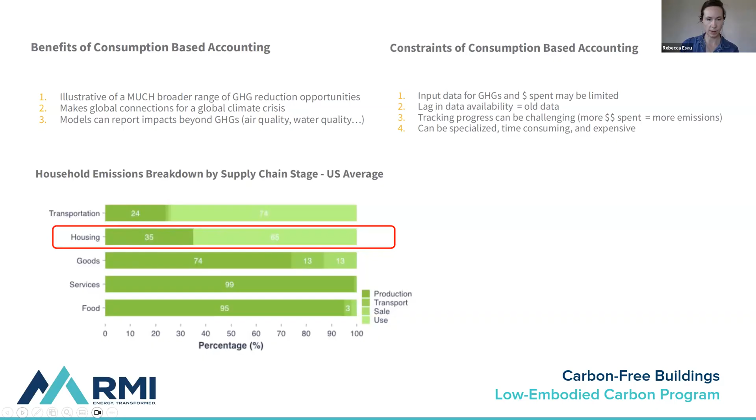So you can go back and look at his slide deck. It's pretty dense. And we also have the recording.

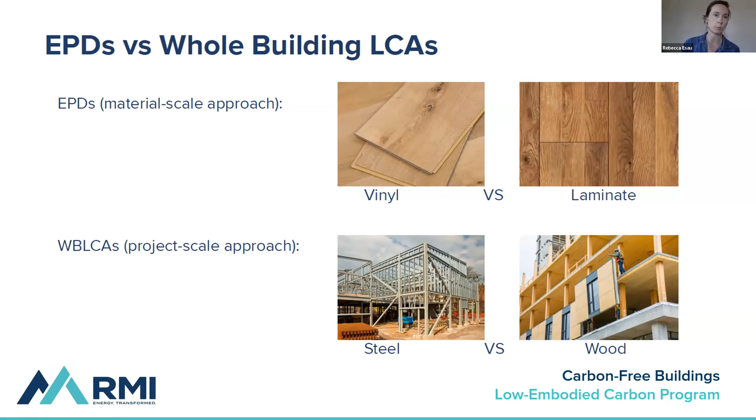Then we also talked about more specifically how to measure embodied carbon at both the project level and the product level. We talked about EPDs, how those are really great documents you can use to compare between 2 different products that have the same function in a building. And then we looked at whole building LCAs, how you could do a calculation that would tell you the embodied carbon per square foot of a building. So we talked about the pros and cons of both of those measurement methods.

And then we had Beverly Craig from Mass CEC come online, and she told us about a few really interesting Massachusetts state programs that she's launched in the recent months.

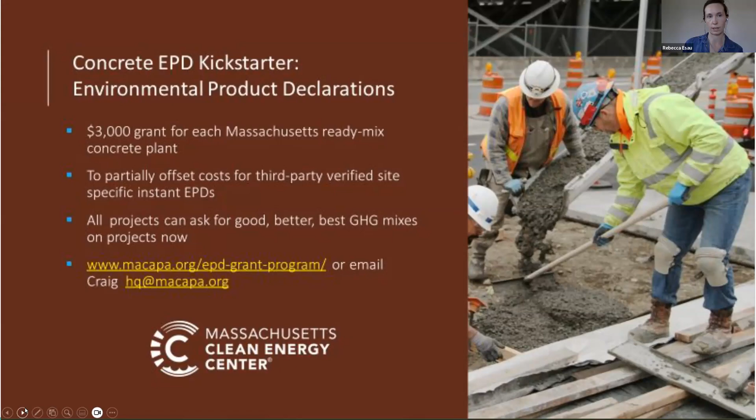The first is an EPD Kickstarter program. This is a grant program specifically for ready-mix concrete suppliers to get their EPDs. There's money of up to $3,000 for each ready-mix concrete plant to do an EPD that's then available to the consumer. There's also an embodied carbon reduction challenge, which looks at the whole building.

So project teams can submit their building projects into this competition. The entries are due March 31st of next year, and there are a few different prizes to be had for this.

And then lastly, this was not part of our presentation last time, but we've had a lot of discussion about concrete as a material we use in construction all the time. It has a really big opportunity to reduce embodied carbon. Many of you in smaller municipalities may not be building large buildings, but you may be replacing a sidewalk every once in a while or repaving a road. I recently attended this webinar and wanted to share this link with you. It's an excellent overview of low carbon concrete, what it looks like, how you can apply it, and an overview of policies that exist that help either through procurement policies or pilots.

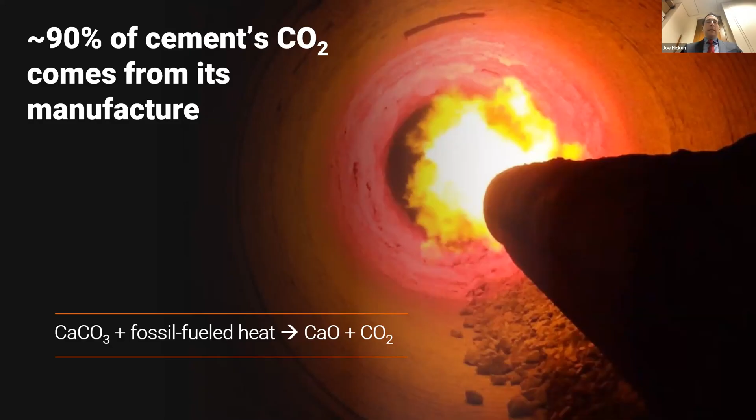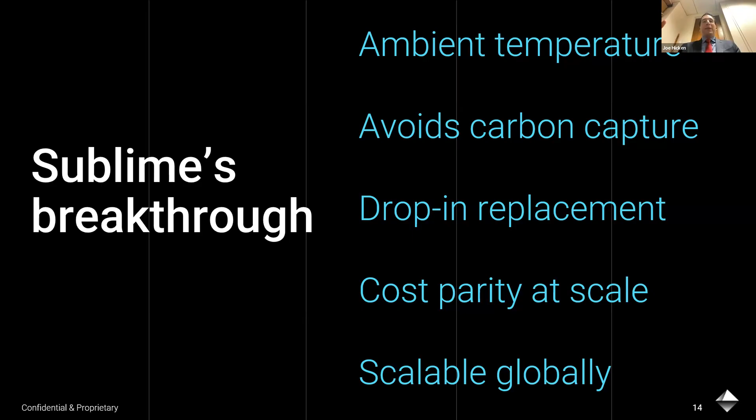Next slide, please. So Sublime Systems' contribution in this space is from my boss, Dr. Leah Ellis, and Professor Yet-Ming Chiang. You might have come across them in the climate technology space before as it relates to energy storage and transmission. They've invented a novel process, an ambient temperature process which avoids carbon capture. It produces the same drop-in material - designed to be the same functional material, both in the way it's transported, the way it feels when wet, and the way it hardens into that final product we're all familiar with in our sidewalks, roads, and buildings. We can scale this to cost parity, and the feedstocks are scalable globally, more abundant on planet Earth than today's limestone.

Next slide, please. So this is our product - concrete made with Sublime cement. Our process is unique in that it's a true zero manufacturing process. We're not emitting CO2 and accounting for it through some sort of net calculation. It's truly a carbon avoidance technology, which is really important when we think about what levers are available to us to mitigate these emissions.

Second, the company was founded on the idea that we can't bring a material that doesn't meet existing building standards. There's a lot of solutions trying to get at this carbon challenge, but they've got a harder road in terms of adoption because they don't meet an existing standard that the construction industry is familiar with. Ours meets ASTM C1157, the performance standard for hydraulic cements.

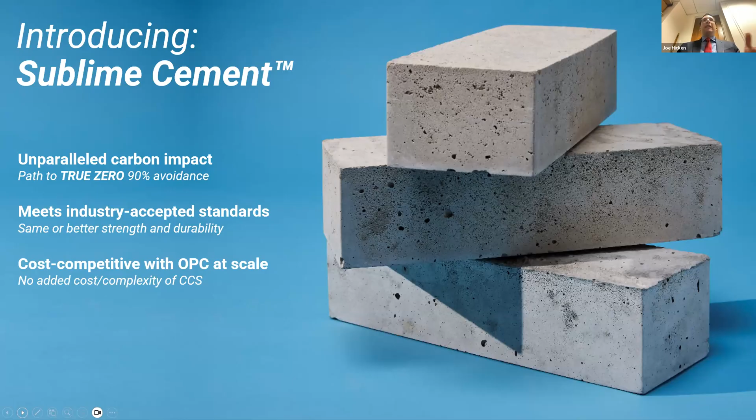The company's concept is that at scale, we can produce this material at cost parity without a price of carbon, without any additional financial considerations. We're trying to bring something that's truly just a cleaner version of the same material we use in all of our infrastructure.

So in context, how do we do what we do? I've got just a few more minutes, so I'll whip through these quickly. In today's manufacturing process, about half the emissions come from the fossil fuel itself, and half come from the raw materials.

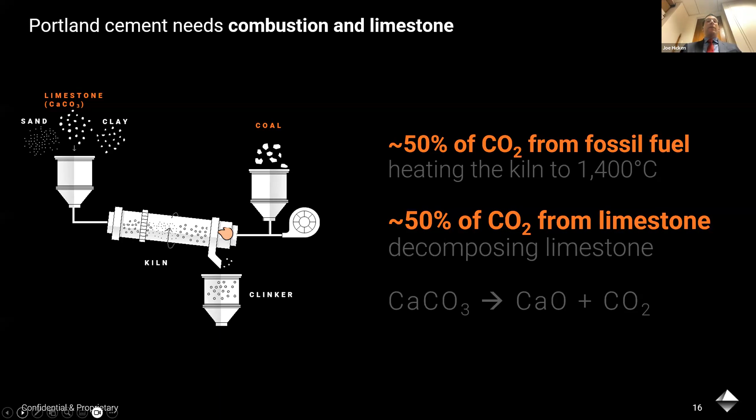As much as it hurts my heart to say this, no one really cares about cement—people care about concrete. Cement is manufactured, milled, stored in silos, transported through freight and water transportation, then procured by ready-mix concrete producers with rocks, stones, aggregate, admixtures and other chemicals. It's brought to the job site and poured, where it hardens into calcium silicate hydrate—the hardened phase we all know and love as concrete.

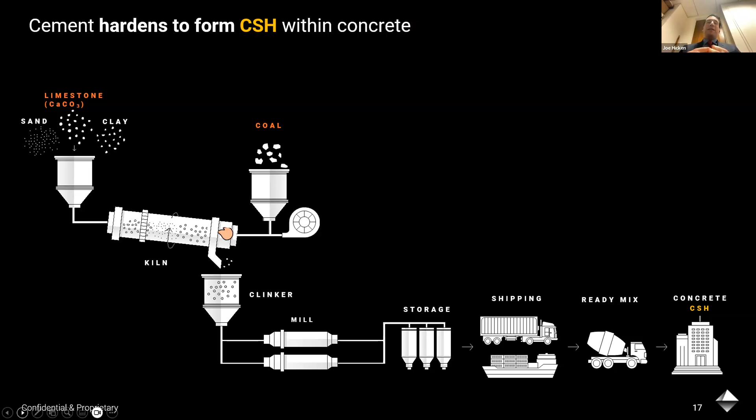At Sublime Systems, we're not interested in touching any of that downstream complexity. There's a huge, robust, and competent construction industry that does this all very well. So it was really important for us to only touch the very upstream part of this process.

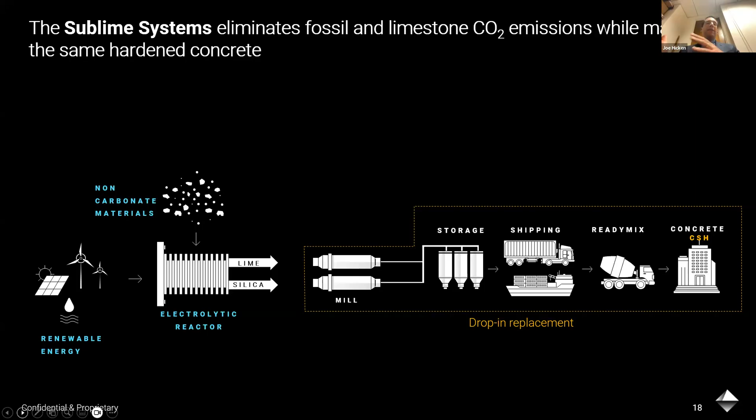Ours is an all-electric process powered by renewable electricity, using non-carbonate feedstock—we're not using limestone in the manufacture of our lime and silicates. We're producing a hydraulic cement, a calcium silicate hydraulic cement, that results in the same calcium silicate hydrate at the end of the equation.

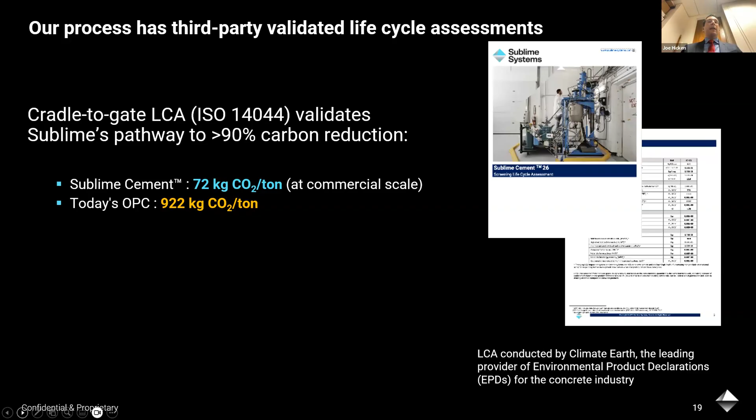Don't take our word for it. I like to tell people I work with a bunch of Boy Scouts and Girl Scouts in terms of the carbon avoidance of our process and the lack of other externalities—that's another question I often get. If you have a third-party EPD or LCA—you can't get an EPD until you've had a commercial facility operating for over a year—but we have a preliminary LCA that validates our process can avoid over 90% of the emissions in the manufacture of cement.

In terms of Sublime Systems and how we're scaling, and how we might be relevant to municipalities in the Commonwealth, we're rapidly scaling this—we have a TRL6 factory in Greentown Labs. We've basically de-risked the product from the performance standards and third-party validation and EPDs, and validated that this process can be autonomous and run at commercially relevant scale.

We've got the site selected and we're in the final stages of diligence on the parcel in Western Massachusetts, where we'll build out this next facility manufacturing 30,000 tons of cement per year. We'd love to engage with you all if you're thinking about infrastructure—municipalities have a critical role in climate action as it relates to mobility, but also the embodied carbon in infrastructure being deployed.

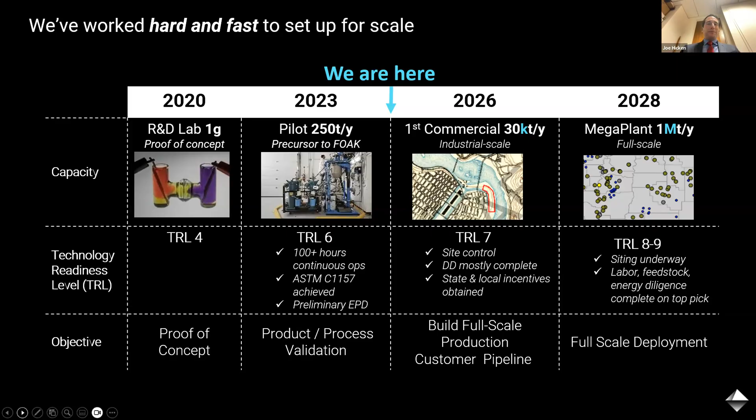I'll conclude on this last slide—this is a really interesting part for us in terms of scaling this technology: how do you all account for carbon in your operations? How are you thinking about future infrastructure, embodied carbon versus operational carbon? How might you make the case internally for investments in Scope 3 emissions reductions that Sublime Systems can help with, and understanding how we fit into your larger sustainability objectives would be a really important part of the conversation we'd love to continue having with you all.

So I'll wrap there, and unfortunately I'm going to have to miss the breakout sessions. I'm actually in Senator Markey's storage closet, a quiet place for me to chat with you all. But I hope to have an opportunity to chat more with you in depth if you're thinking about embodied carbon in construction of future infrastructure. Rebecca, Miranda, really appreciate the opportunity to address you all with this.

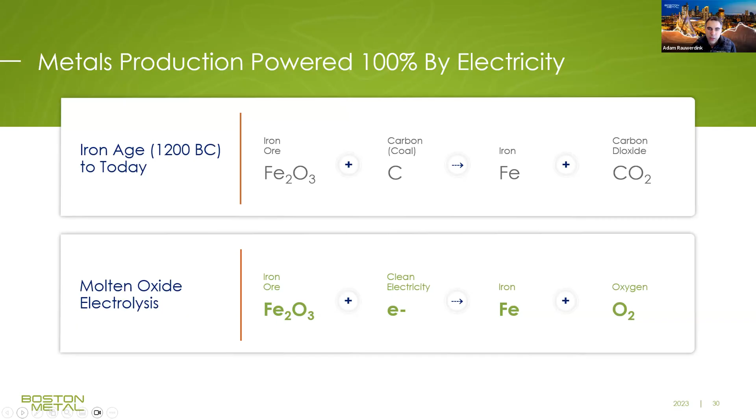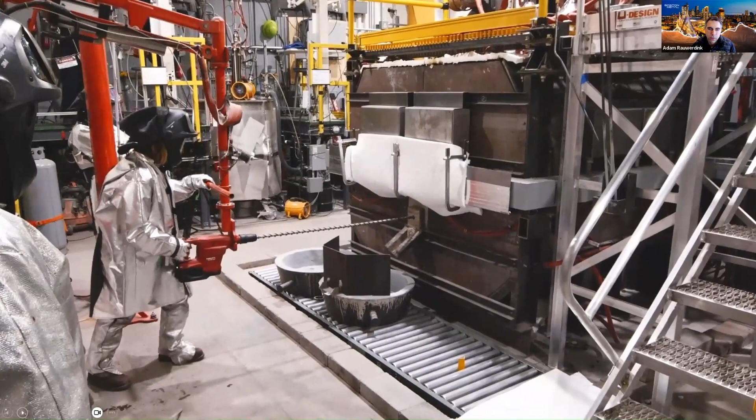So that's pouring molten steel. It's about 1600 degrees Celsius, close to 3000 degrees Fahrenheit. And again, that's the molten product produced without emissions.

From there, you can alloy that, cast it, roll it, heat treat it—whatever you need to do—using all the downstream processes to get the grades of steel you'd use today in bridges, in buildings, in power tools, in appliances, in automotives. But we've eliminated the first step in the process, which is where the emissions are today.

Go to the next slide. This is the future of what steel looks like today. 70% of steel is produced using carbon—that's where you think of the blast furnace. There's certainly been efficiency improvements, but they've never been able to separate steel production from carbon.

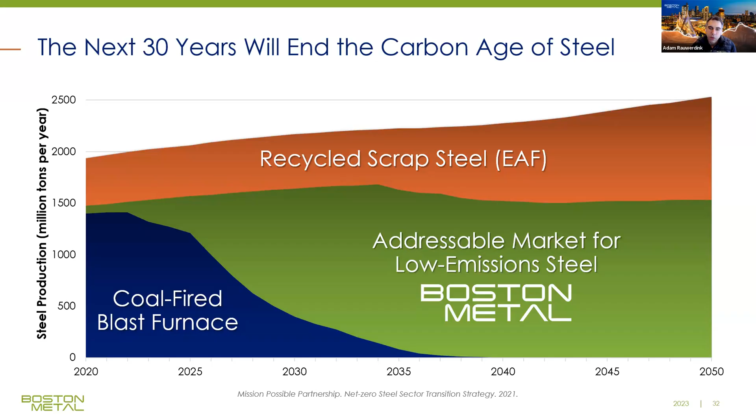Steel is great in that it can be recycled almost indefinitely, and about 30% of the global market is from recycling. That will grow over the decades ahead. But the big challenge is you've got 1.5 billion tons of steel being produced today using carbon. If you're going to achieve net zero in the next few decades, that process needs to change. And that's the technology and the scale of technology that we're developing at Boston Metal.

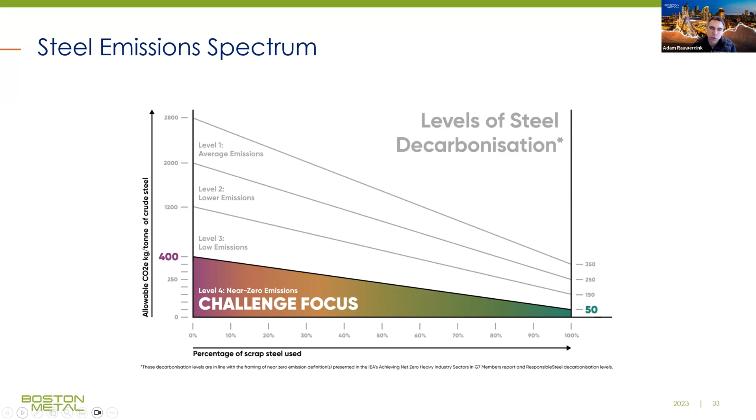And there's groups like Responsible Steel and others doing a lot of great work to make it easier for you and others that are the end users to understand how steel can be measured, the embodied carbon, and to push the industry forward through technologies like ours.

Next slide. Just in wrapping up: today there is low emission steel available through recycling, but it's limited. We are working to bring that across the full supply—100% of the steel supply—to decarbonize that. You have the benefit as end users or purchasers that there are emissions standards and processes coming in place.

Responsible Steel is one of those. Historically, that was a lot harder—individual automakers, for example, had to work with their supply teams and their procurement teams to figure out the emissions between two different suppliers of steel.

That's being standardized, similar to what Joe was explaining with cement and concrete, because so much of the process happens downstream, the actual end products are exactly the same and can be very quickly tested and qualified, but you can eliminate the emissions up front. Electricity is a big driver for the process and competitiveness, but at the prices you can get from renewables today, we can be on par directly with the incumbent process.

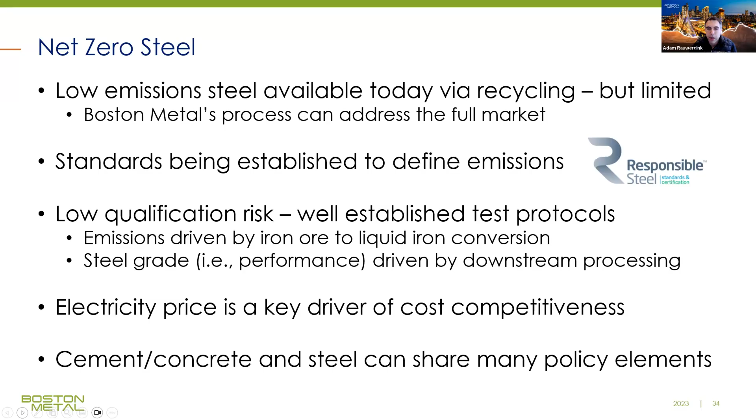And fortunately, I think a lot of the policy elements that are in play today to support cement and concrete procurement also support steel procurement—a lot of those can leverage very similar elements just because of the way these products are made. Hopefully that will accelerate the pace of adoption. Thank you very much.

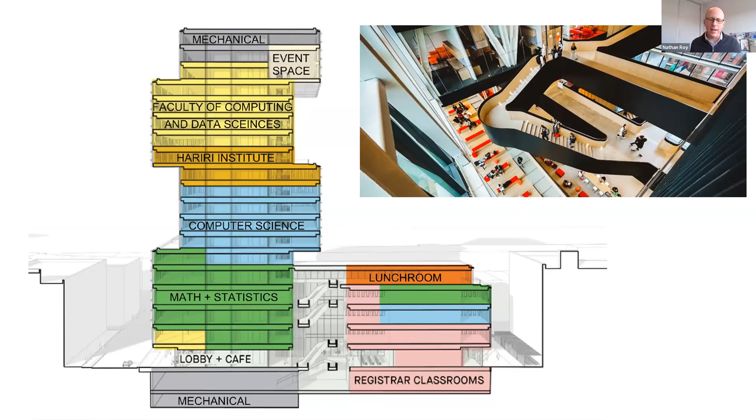There's also a series of interconnecting stairs over the building height, again encouraging people to interact between floors, and reflecting that vertical campus they're looking for.

BU has a very strong climate action plan, and when we started the project, it was focused on reducing operational carbon. That was the focus for the building, finding ways to reduce the amount of carbon it takes to run it.

So the building employs things like geothermal wells that extend 1,500 feet into the ground, heat pump chillers, active chilled beams to reduce some of the demands on the mechanical systems, a triple glazed facade, and sun shading to reduce the solar heat gain in the summer.

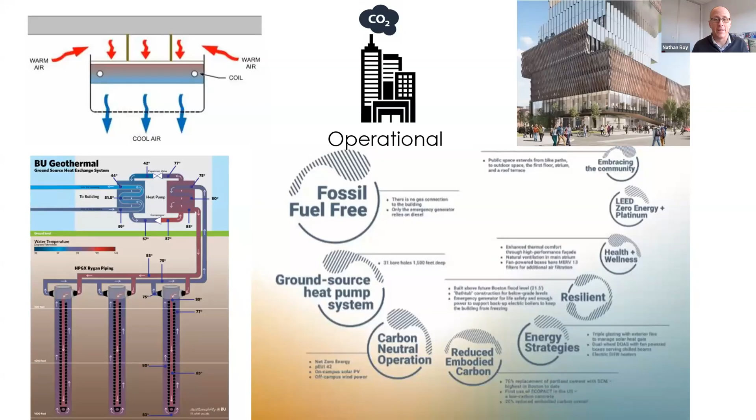BU challenged the design team: we're doing a lot to reduce operational carbon, but what can we do to reduce the embodied carbon that it takes to build the building? So that was our task.

Before we get there, I want to set the stage on what the building is. If you've seen it, you've seen this offsetting massing, these cantilever forms that jut out from the building, very distinctive.

If you looked at the building from above, it's very simple, the tower portion is 6 bays by 6 bays. In the center, 4 bays by 4 bays are continuous from the top of the building down to terra firma. On any floor plate, we cantilever from 2 sides.

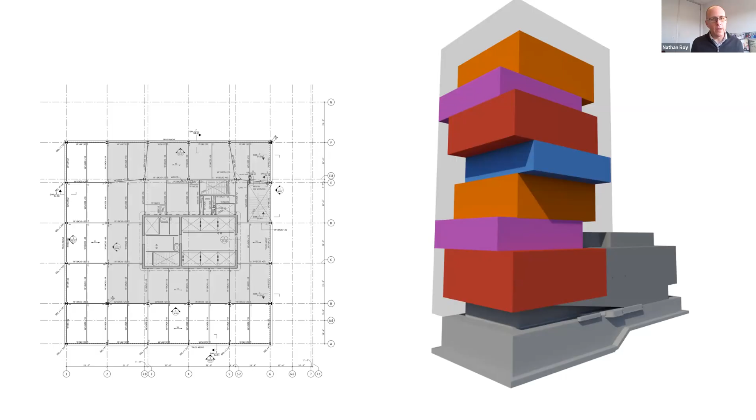How do we structure that? How do we support it? We have a series of belt trusses that run around the perimeter on every offset massing, alternating from a 2-story to a 3-story space, but we have a 2-story deep truss. They're comprised of either a simple span or cantilever trusses that are supported off the section of the building that goes all the way down to terra firma.

If you think of it as a stool, that stool needs 3 supports. We get 2 supports pretty easily, with cantilever trusses with that leading edge supported off the building that goes to terra firma. But we have a 3rd one that needs support.

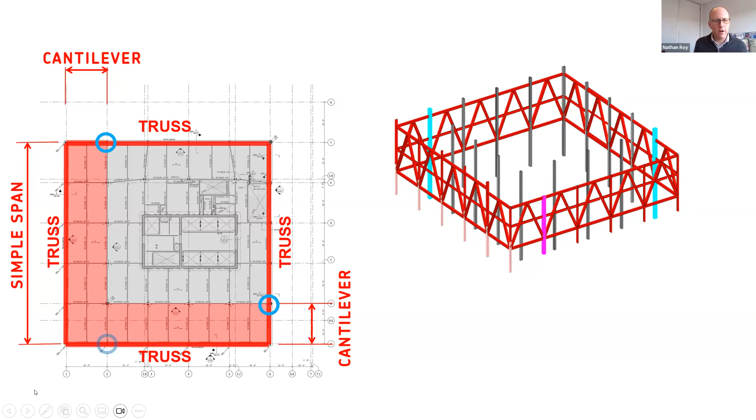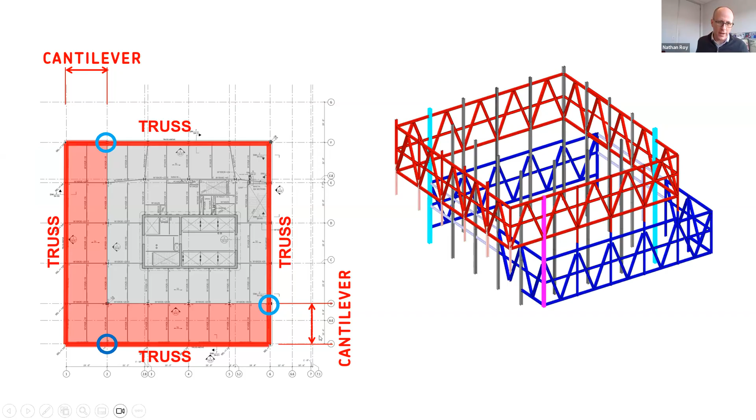There's nothing below, nothing above, right? It goes all the way down. So how did we support that? It's the next series of cantilever trusses that would either support it from below or hang it from above, then bring that load back to our center 4 bay by 4 bay. We repeat that process as we move our way down the building.

How do we support the building? This is one of the deepest parts in Boston to bedrock. It's almost 200 feet to bedrock, and we're located at the edge of the Back Bay. So we have 170 feet of clay.

Typically a building this size would have foundations that extend all the way down to bedrock. We were really trying to minimize materials and minimize cost, so what we ended up doing was what we call floating the building.

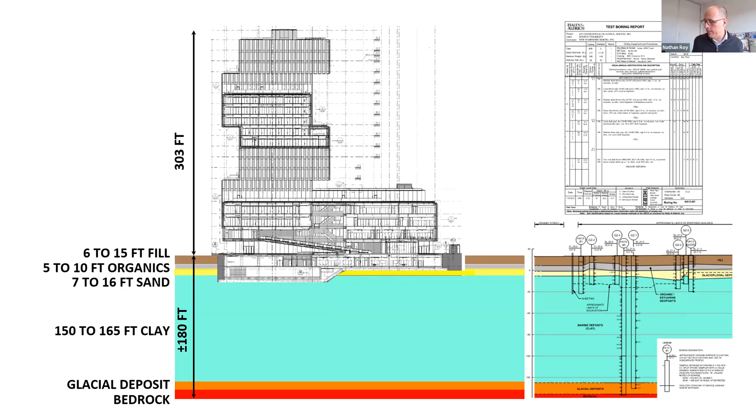It's really about the amount of load we take out for the soil. We dig down, that soil has a certain weight, and we keep our building to that weight so it's balanced. So the clay below doesn't know any different — it's the load it always felt.

It was really tricky because we had to balance. We had this 20-story building, so how do we keep the load as light as possible to not have to dig too deep? We ended up digging 2 stories down, about 40 feet.

Our foundation is under the podium. We have a 3'6" mat. The mat thickens to 5 feet under the tower, and then under that center portion of the tower it ranges between 6 and 9 feet thick of concrete. So a lot of concrete.

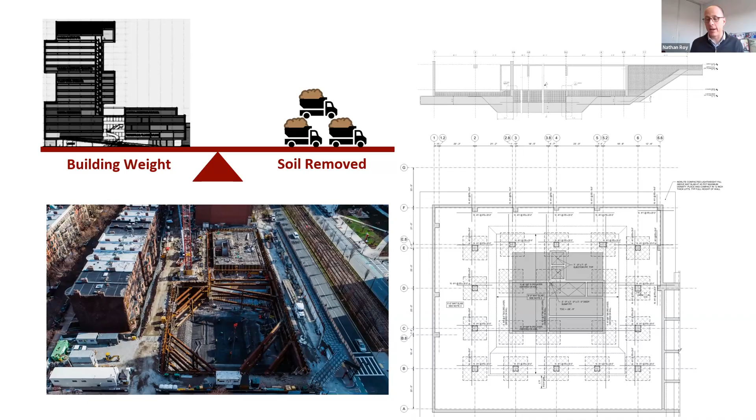And like Joe talked about, it takes a lot of energy and a lot of carbon to make that concrete. So, embodied carbon opportunities.

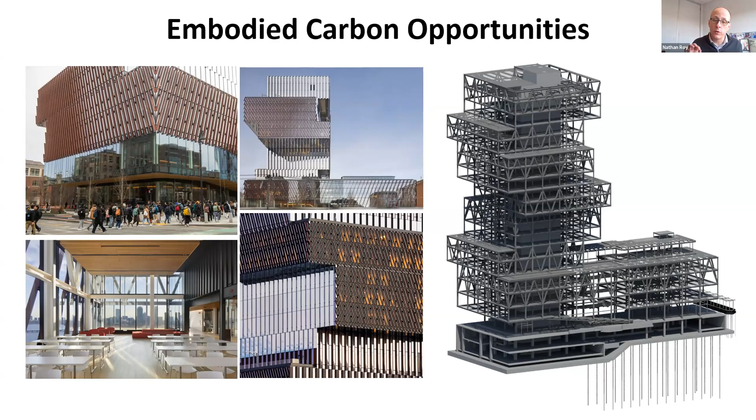When BU came to us, we were looking for different ways we could reduce the carbon. We looked at the steel — can we use higher strength steel to get the same performance and reduce the carbon? We really wanted to stay away from affecting the facade, because the facade was so tied into the mechanical systems and the operational carbon. So what we decided to focus on most was reducing the embodied carbon for the concrete elements.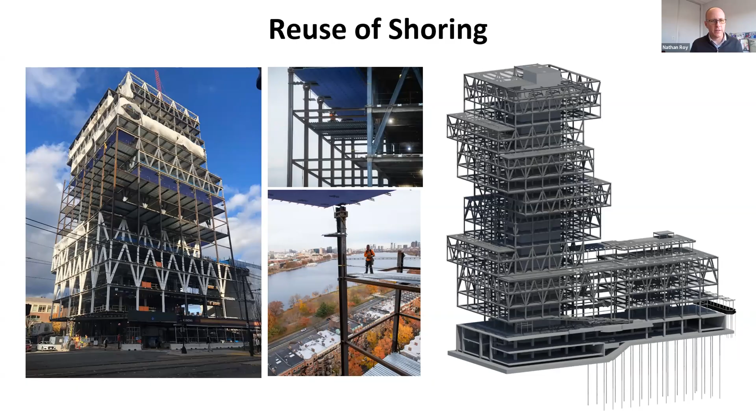Before we get there, if you saw the building under construction, I want to talk about the elephant in the room. To build this unique building, we had a lot of temporary steel shoring to support those cantilevers until the building was in place. Over 90% of that steel was disassembled, shipped back to the fabricator, and is going to be reused for another building. So the carbon it took was really just the transportation to site and back.

Coming back to reducing the carbon in the building, we decided to focus on 4 main elements that represented a big portion of the concrete: the mat foundation, the foundation walls around the perimeter of the basement, the concrete core, and the columns.

This table shows your typical supplementary cementitious material replacement — taking out the Portland cement and putting in other materials like slag or fly ash. In Boston, elements like the mat would historically be in the 40% range, and things like the foundation walls and core more like 20%. What we wanted to find out is, can we do better? Can we take out more Portland cement to reduce the embodied carbon?

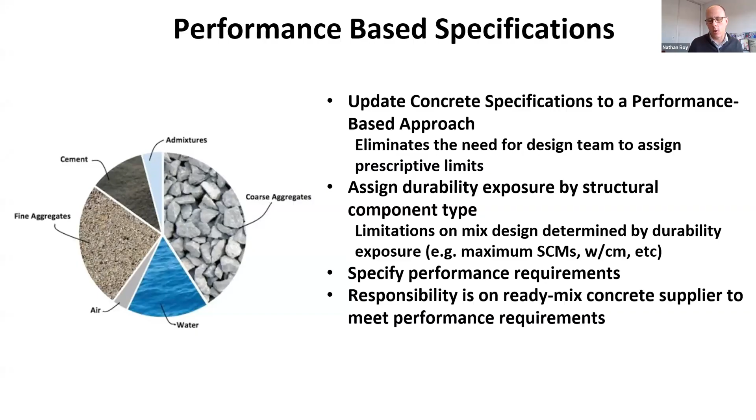So we decided to move from what's historically been a more prescriptive approach to concrete, specifying a minimum amount of cement for different concrete strengths, to more of a performance-based approach, where we ask: what are we looking to get out of our concrete? How do we want it to behave — strength, elasticity, workability, finish, how much shrinkage we would allow, durability.

As we take out Portland cement and put in things like fly ash and slag, it has different effects on different performances of the concrete — things like heat of hydration, early strength, long-term strength. Each element may have different constraints that are more important to that specific element.

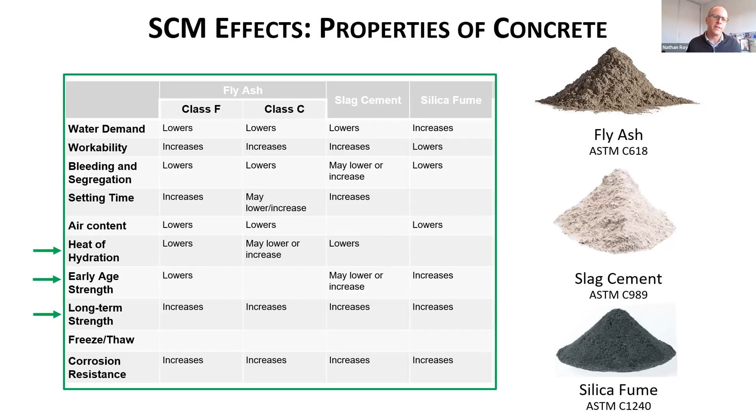One example is the mat. We have a 6,000 PSI concrete mat, and we need that strength for the final condition. But we placed that mat in December, and it takes a long time to actually build the building. Typically concrete is specified at 28-day strength.

We don't really need that concrete strength until much, much later — it takes a while to build the core, and from the core we build the steel. After the steel, we put the concrete, and then the facade. So we could really leverage not needing that strength until later in the design, 56 days and plus. And we were trying to work with local providers — how can that help us?

So how do we do this? It was really like reaching out to local concrete providers, seeing what they can do for us, and then collaboration back and forth and getting everybody in the room.

So we started with just kind of this pie in the sky table, some of the performance criteria we were looking for our different elements, and then some SCM goals in trying to really take out as much Portland cement as we could.

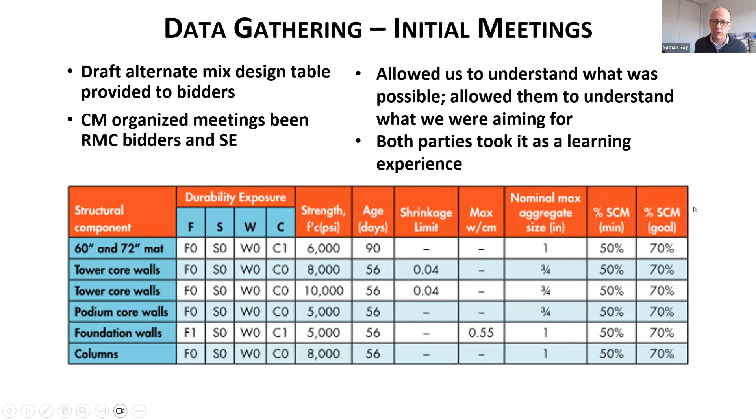It was all, again, conversation with the owner, with the contractor Suffolk, with the concrete supplier SNF. We ran project-specific trial batches to make sure that the proposed mixes that the local providers were hoping we can get would meet those performance requirements that we were looking for.

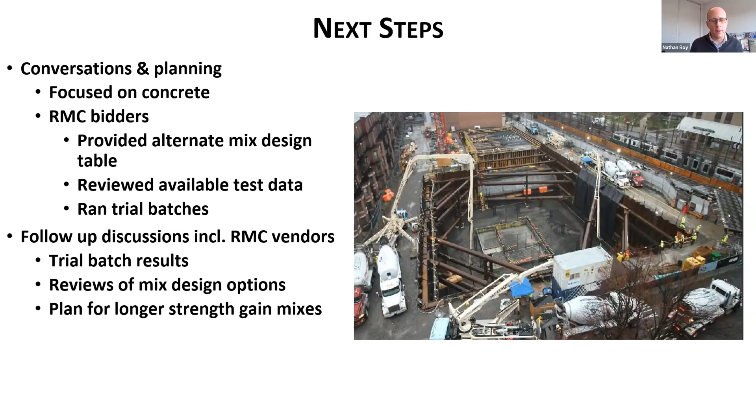So kind of coming back to that table, we talked about Boston baseline, and then compared to what we ended up using, we were able to get 60 to 80% SCM replacements in some of our elements and still get the same performance as we would have, which was a success.

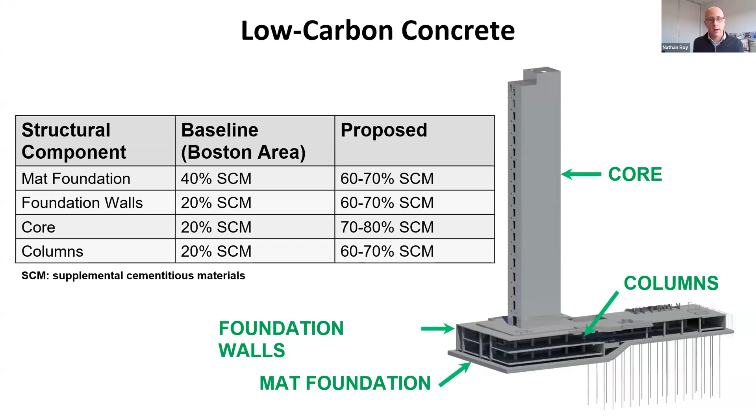So we took that information and we ran a whole building life cycle assessment to see what that reduced embodied carbon was for our structure. So both the structure and the enclosure, we use Tally.

And out of the structure, we are able to reduce 14% of the embodied carbon just by tackling the concrete.

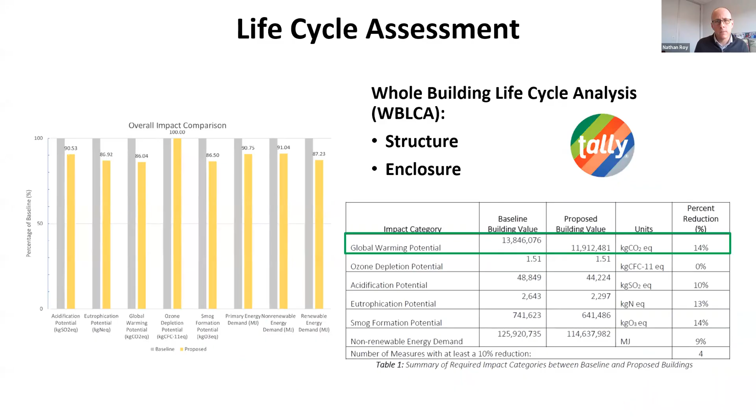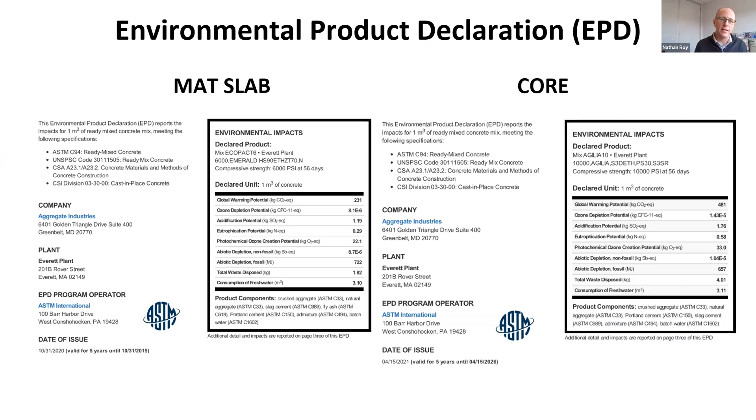At the time, and this was a few years ago, early in probably 2019, we didn't have EPDs, but by the time the project finished, we had EPDs for all of these concrete mixes. So I think if there's one lesson learned, it's just asking your concrete providers, or really any provider, to produce these EPDs, because it's really going to help push the industry forward.

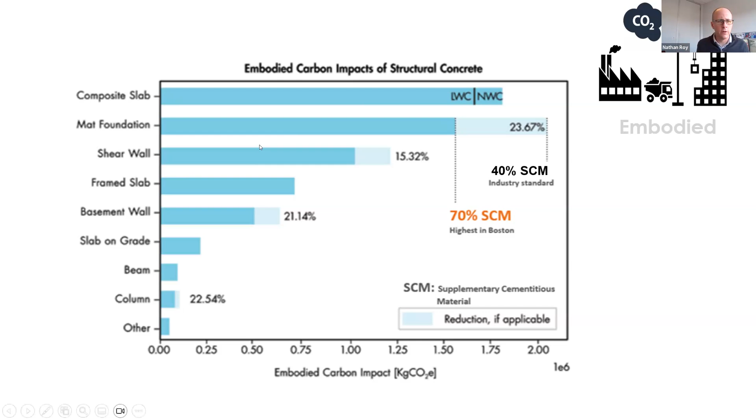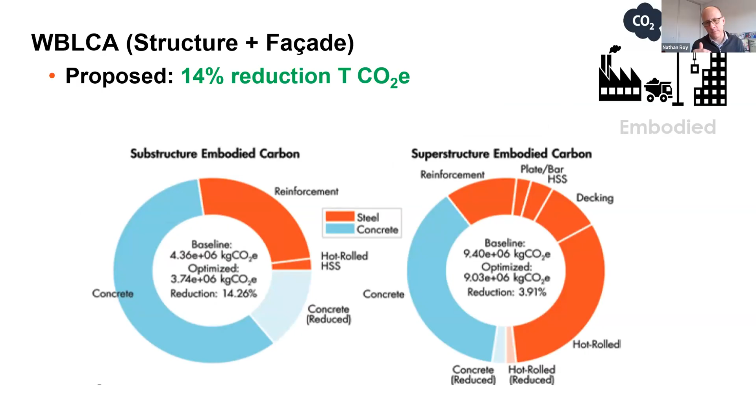And with that, I think this is the same slide, just breaking up by substructure, which is foundations on the left, and then superstructure on the right. And you can see here, the majority of our concrete was in that foundation mat. That's why we saved the most of our embodied carbon savings was in the substructure, in the foundations.

So I think that's it. Glad to answer any questions if you have them.

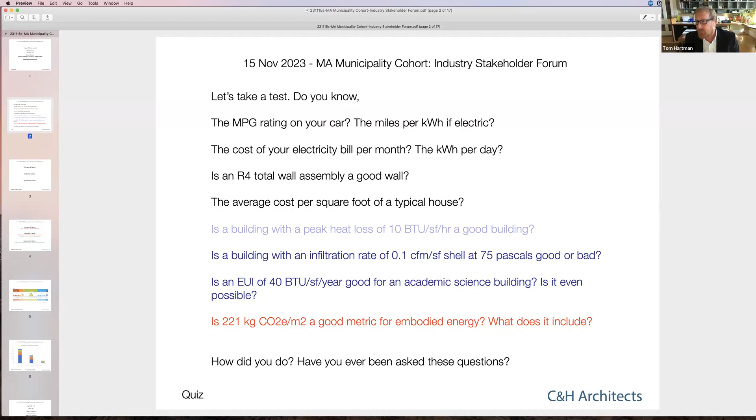Is 221 kilograms of CO2 equivalent per square meter a good metric for embodied carbon? Is that a good number or a bad number? Yeah, it's a good number. Wow, all right, Elizabeth, you're rocking it. Now there may be others, I just can't see everyone. And the joke is 220, 221, whatever it takes. Anybody remember that movie? Anyway, so there's three big factors here.

I'm going to back up: operational carbon, embodied carbon, and sequestered carbon. It drives my wife crazy that we call it embodied carbon, because you would think that's a good thing, but it's not, embodied carbon is not a good thing. I think everyone on this call already knows that. But operational carbon is year to year, what it takes to operate the building. Embodied carbon is what's already emitted in the production of materials. And if it's a negative number, that makes this sequestered. Sequestered carbon is how much can actively be captured and stored in materials from the atmosphere, rapidly renewing materials.

How much does a forest sequester in carbon per year? So really understanding the balance of these is important, because if you use a huge amount of operational carbon or a huge amount of materials to save a small amount of energy, you did more harm than good. So it's really a balancing act, because if you have a project and it's not using a lot of energy or carbon to operate, how you intervene into that building really matters. If it's using a huge amount of energy, it may be that it's addressing the energy system and not the envelope of the building itself, it could be an energy choice. So it's balancing, and I practice what I call architect's math. I don't use decimal points. We need to have information that is good enough to make clear decisions.

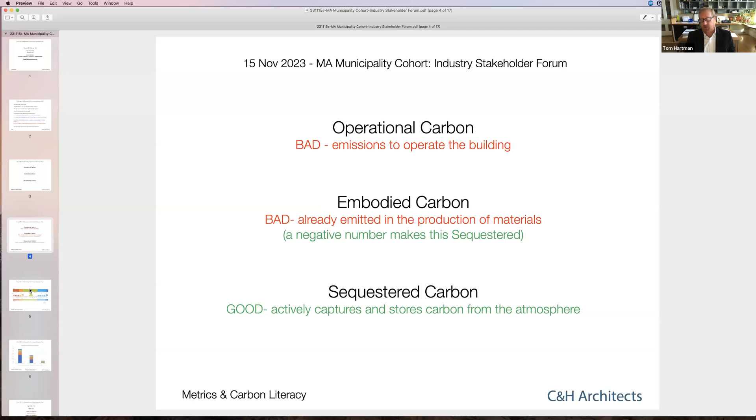We need to train ourselves to think in kilograms per square meter, because that's what the rest of the world is using. That's how EPDs are presented, and we need to train ourselves how to do that. The same way we understand miles per gallon in a vehicle, we need to get there with buildings and carbon in those metric units.

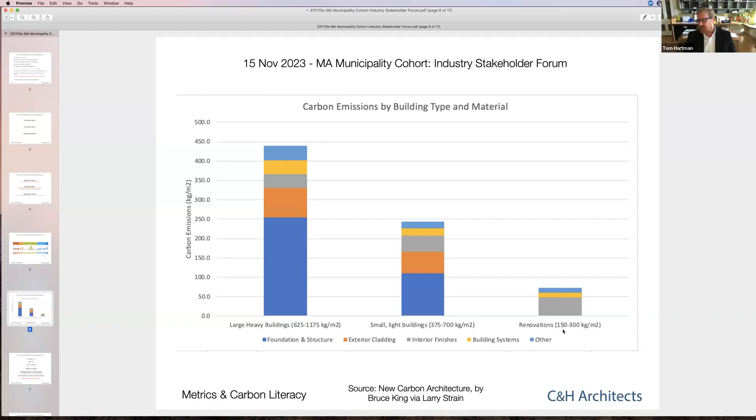A heavy building, concrete, large steel building, might be 600 or 1,000 kilograms per square meter. A renovation, 150 to 300. So 221 is a pretty good building. Just for reference, 1 pound per square foot is 4.8 kilograms per square meter.

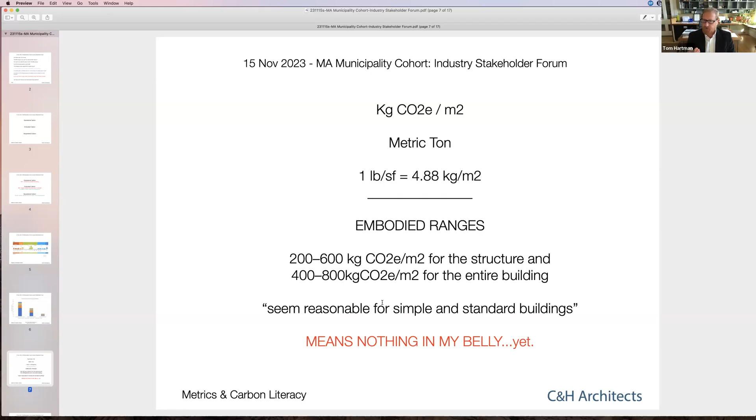So just learn that. But the problem I think we have as an industry is we don't have this in our belly yet. It's an intellectual exercise. The industry at large of architecture and construction is made up mostly of small firms. If it's a 150 person firm, there may be 1 or 2 people whose specific job it is to learn this and become fluent in it. But we have a huge uphill battle.

AIA, I was a strategic council member for AIA National for Massachusetts for the last 3 years. We did a survey, and only 1/3 of our members have confidence, out of 96,000 members, discussing carbon with their clients. That's a problem, that's a huge problem. If you're a client and you ask me about the building code and I say I don't know, you go to the next architect, someone who can actually communicate the way you're looking to be served.

How often, and this is a national discussion, how often does your firm discuss environmental impacts of project decisions with your clients? It's in our code of ethics, for God's sakes, for AIA. Rarely.

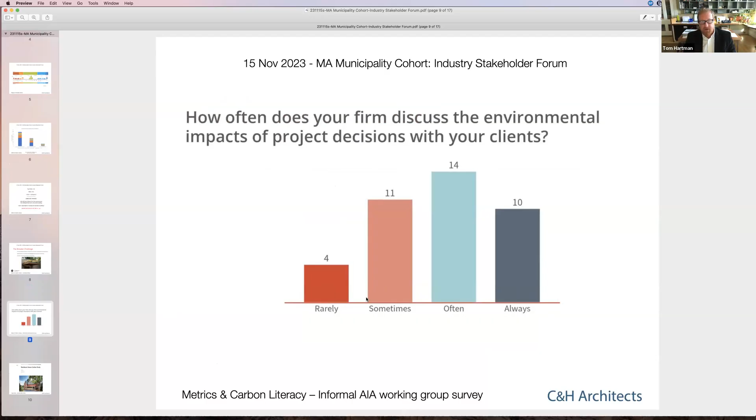I don't need to get into where geographically this could be in the country, but you can see that those clients who are on the front line of thinking about embodied carbon and challenging their design firms, nationally we're way, way, way behind. Massachusetts is pretty far ahead on most every metric, which is great. I also see Joshua from the city of Northampton here. Joshua, nice to meet you.

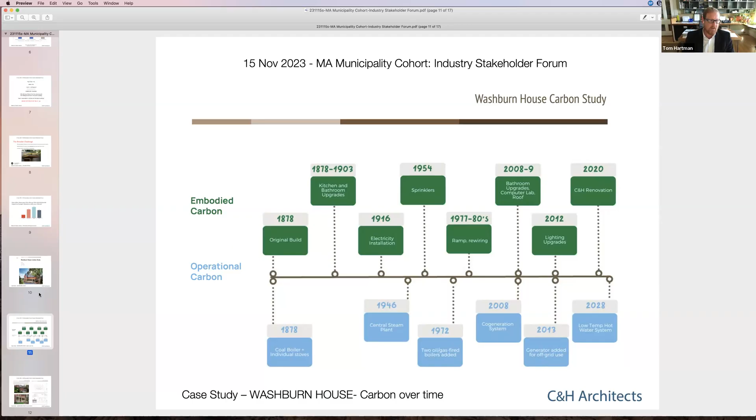It had a series of upgrades in 1916. It got electricity installed, sprinklers in the 50s, bathroom upgrades, and we did a significant renovation in 2020, which took the building off the fossil steam system and set it up for low temperature hot water and cooling. Smith is currently in the process of installing a ground source heat pump district-wide system, which will drastically reduce our operational carbon. We're involved in several of the dormitory renovations doing this.

This is Washburn House. This is what it looked like when we took the project. You can see there was a porch here once upon a time. So we rebuilt the porch and tucked in an accessible ramp. This was designed by budget.

We could have done a lot more, but we had $4.2 million to work with and we got the most out of it. So we looked at, do we insulate the walls? What's the impact of that in terms of operational carbon? How much embodied carbon goes into that? Is it worth doing? How does that compare to the proxy price of carbon? Because if I spend $1,000 to save a metric ton of carbon, that's a really expensive way to save carbon. Is there a better way to spend that money more effectively?

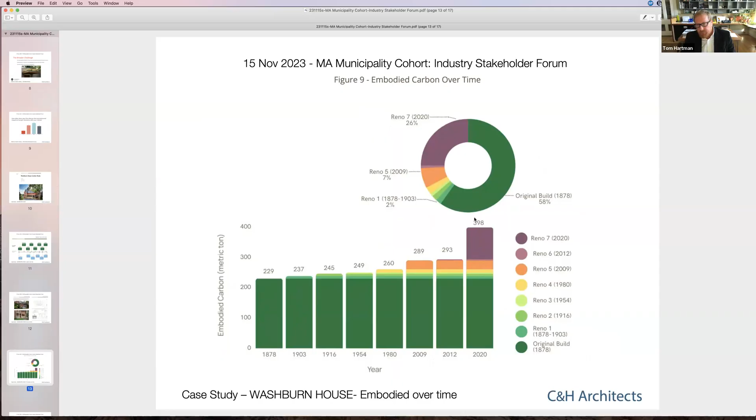That's, as designers, I think one of the primary questions we need to ask. So this is embodied carbon over time: 1878, the original build. Then you can see the small renovations come along through time. And then this is our renovation right here in 2020.

I think it's important to say when Molly came to us this summer, she didn't know much about this at all.

She was able to dive in and focus on taking the embodied carbon classes, the Zoom classes that the Boston Society of Architects put together, reading various books, looking at Tally, looking at various software. She probably had 800 hours this summer that she put into this, and it culminates in a report.

But this is a diagram that I think is really, really quite wonderful. In green, it's the embodied carbon. So here we are, 220 metric tons of carbon to get it built. And then the blue line is the operational carbon. You can see they put in a cogen system, and now once they're going to go to electrified ground source heat pumps, that operational should be very, very low.

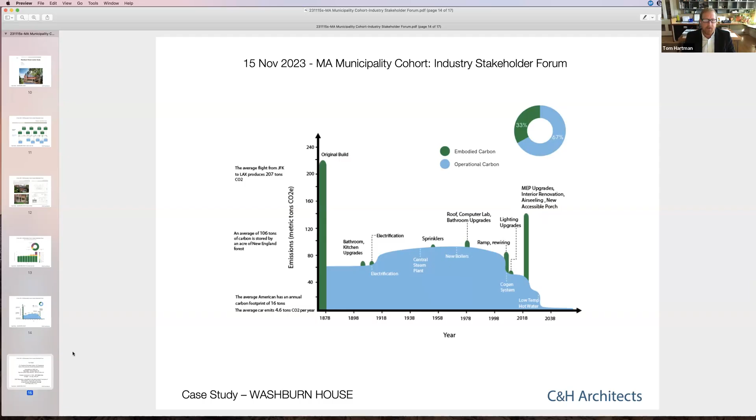This is our renovation, so we made the second biggest bump. But we also set the building up for the next 100 years, and I think that's an important contribution.

So here's the big takeaway. Over the life of that building, one third of the total carbon is embodied, two thirds is operational. Again, that operational is going to go way down in the future. None of the products we used included sequestered carbon, so not everything is an add. The renovation was about 150 kilograms CO2 per square meter, and a new low carbon, high efficiency building is somewhere around 260 based on the CARE tool.

So just to put this into our bellies, right? The original construction, 1878, 207 metric tons, most of that is the masonry. That's equivalent to a full flight one way from JFK to LAX. That's how much carbon that is. Can you imagine how much fuel that is, what that takes?

That's 6, 7 hours of just a jet flying. The renovation was 105 metric tons, and that's the equivalent of 1 acre of New England forest over the life of the forest, 140 years or something like that, or approximately 250 acres in 1 year.

0.4 metric tons per acre is the number I'm getting. So to try and put that into perspective, it's going to take a long time for that to be sequestered by a forest. But I think that's an important metric for us to start to understand, not only the expended amount of carbon, but what is required to sequester that.

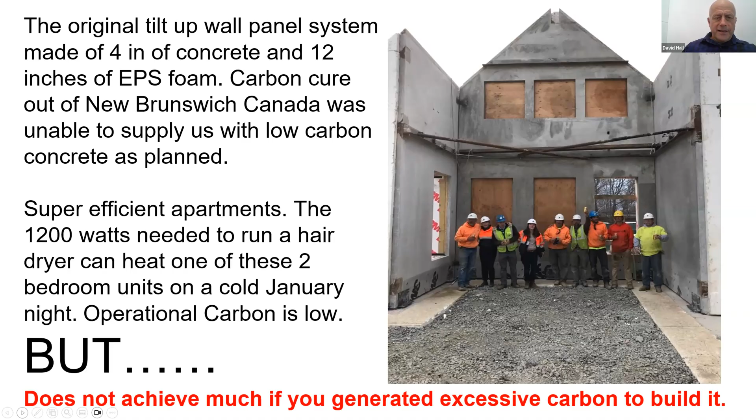So we went completely in the other direction. Go ahead, Becca. And we went to hempcrete, hemp lime wall panel technology. This is an industrial hemp plant that is carefully harvested and processed in a decorticating operation. We take these dust-free bales of hemp fiber, blend them a yard at a time with a binder, and then use compressors to fire them into our cribs, our wall panel cribs.

Now, in a perfect world we would have used no steel, but because we were taking these risks, building in a manner that I don't believe has been done stateside or much in Europe, we did use some steel in the frame so that we didn't get distortion or torsion during the tilt-up process. How about the next slide?

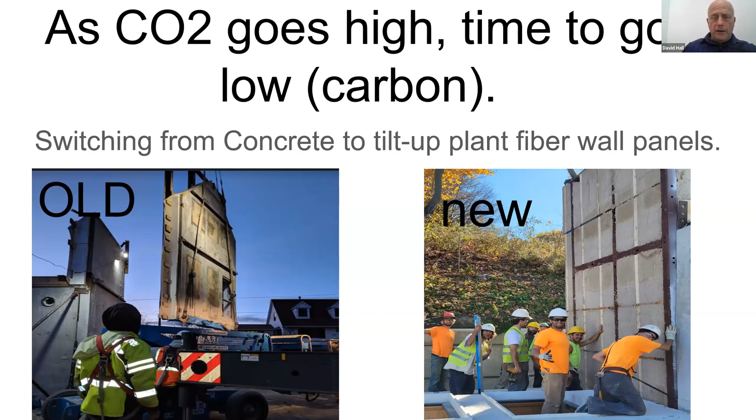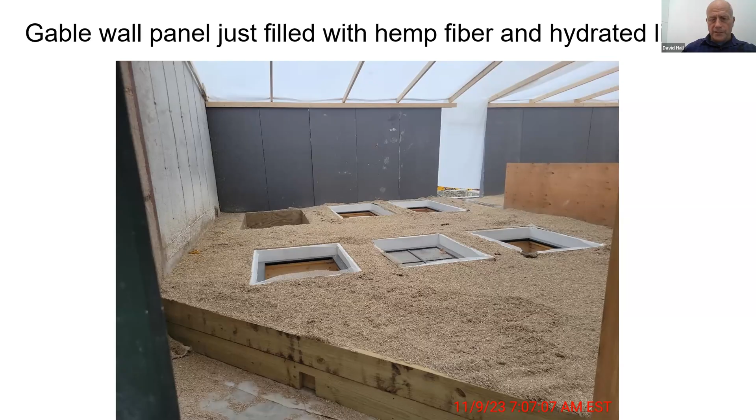So yeah, we went all the way to the other end of the spectrum here. This is a gable wall panel, about 29 feet top to bottom. We set all the window units in the walls, and then we insert the hemp fiber. Now this has a lot of rebound on top of it from the shooting, it creates somewhat of a snowstorm, I should say hemp storm, when you're shooting this stuff. So a lot of loose fiber will migrate around your space, and that's why you're seeing these deposits on top.

And I don't believe anyone's tried to build a 12-unit apartment building with hempcrete yet in the US. So we've just finished shooting 1,600 bales of material, and we just did our first tilt-up a couple of weeks ago. We have another one coming online next.

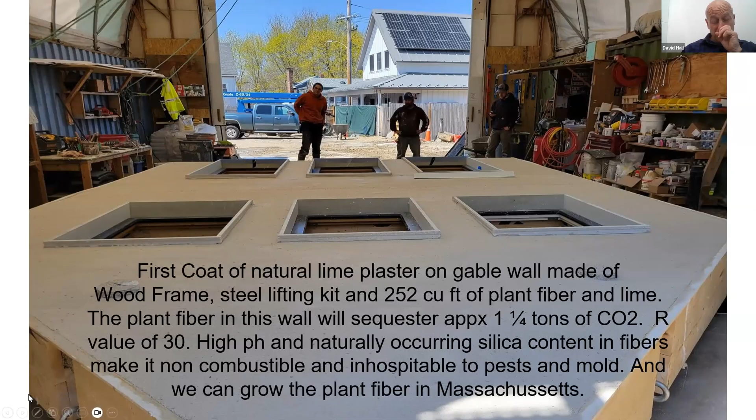In our next building, which is a 20-unit building, we will be able to free ourselves of a lot of steel, and we'll be able to accompany that with CLT, cross-laminated timber technology. And hopefully we could work with Sublime so that we really are making a big, big difference by combining plant fiber in this manner with the amazing technology in the cement industry and from Sublime that we've heard about today.